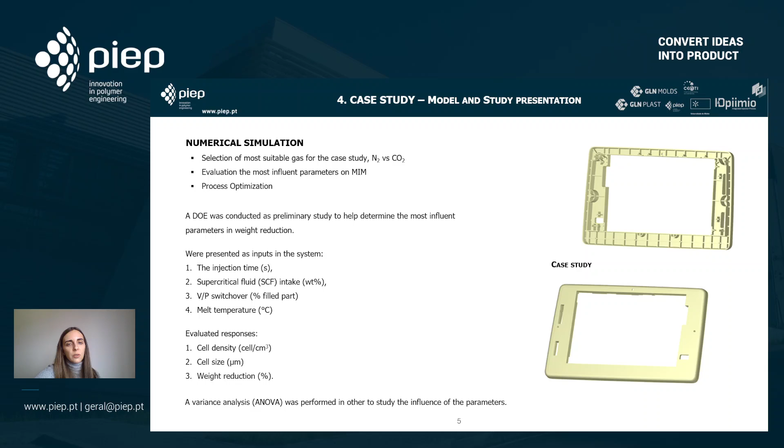So in the first case study, with nitrogen versus carbon dioxide, we started the study with different amounts of incorporation, either for CO2 or N2. We wanted to determine which was going to be better for this part. So we evaluated weight reduction, cell density, and cell size. Weight reduction would give us which gas was better to obtain higher amounts of weight reduction, and cell size and cell density would help us predict which was the better cell structure for this part.

So what we wanted to do was to analyze different amounts of incorporation of either N2 or CO2 and evaluate these results. The amount of incorporation of CO2 and N2 is very different because the gases have very different values of solubility in the polymer melt. In the case of CO2, it is much more soluble, and so to saturate the melt with the gas, you need a much higher quantity of CO2 than N2 for the same result.

So by analyzing the results we had, we could see that weight reduction was not a very variable factor, a response that we could actually vary. And it is important to note that in this phase, there is not an injection molding equipment, so a lot of the process is still being defined, so there is not an optimization. So weight reduction values here are still low, and we have to center our study on the cell size and cell density.

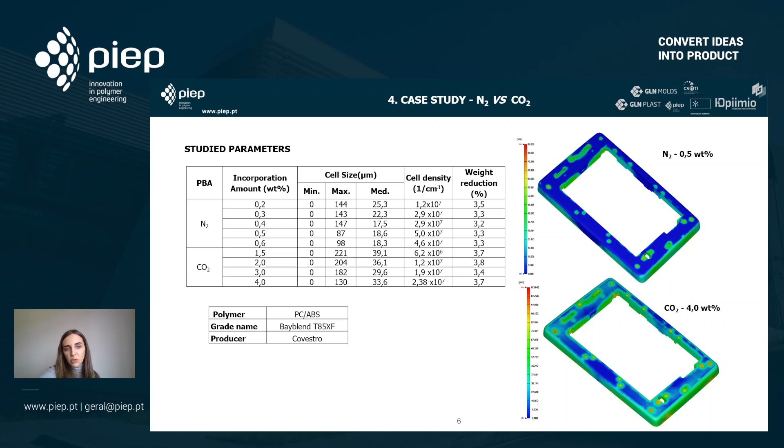So what we could analyze and define was that the cell density was higher for nitrogen than for carbon dioxide, with lower cell sizes. And what it means to have higher cell density and lower cell sizes is that for the same region, for the same cubic centimeter, you have a higher number of cells with lower size, so there is a lower quantity of empty space due to the gas, and the mechanical properties would be higher. So in this case, we chose nitrogen to continue with the study.

Having chosen nitrogen, we then went on to perform a DoE Taguchi L16 matrix to determine which were the most influent parameters to obtain high weight reduction.

In this case, the input factors were determined by an extensive literature review, and as we wanted to know specifically for this part which was the best results, we conducted this DoE with these four factors. So the factors were filling time, gas incorporation, melt temperature, and velocity pressure switchover. In this case, the velocity pressure switchover is the amount of material that is on the cavity.

So we wanted to have a 95% fill or a 98% fill of the cavity before finishing the filling of the part. Once again, the evaluated responses were cell size, cell density, and weight reduction. In this case, weight reduction is the most important. However, we have to analyze also cell size and cell density because we want to make sure that the cell structure is good for the produced part and to promote good mechanical properties.

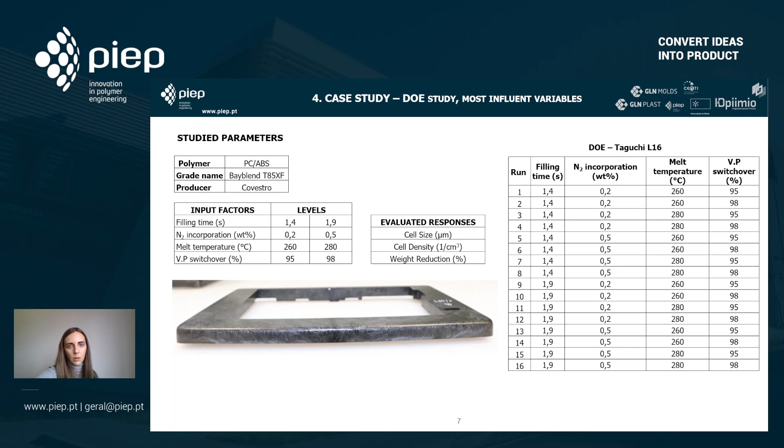Having conducted this DoE, we then study the most influent parameters as a result of the responses we obtained. The responses are presented here on the table on the right, and from the influence graphs, we can see that for cell size and cell density, we will have inverse responses. For lower cell sizes, that is what we want, we would have to incorporate 0.5 amount of the gas, which is one of the most influent parameters, and fill the cavity to 98% with the velocity pressure switchover, which is another of the most influent parameters.

In the case of cell density, we want to have higher volume of cell density. So again, we can see that the 0.5% of gas is the best result for this part, and again 98% of the fill cavity promotes also higher density for the part. But when analyzing weight reduction, we can see that the influent parameters change a bit. So what we can analyze is that the filling time is one of the most influent parameters, along with the VP switchover. It's also another very important parameter.

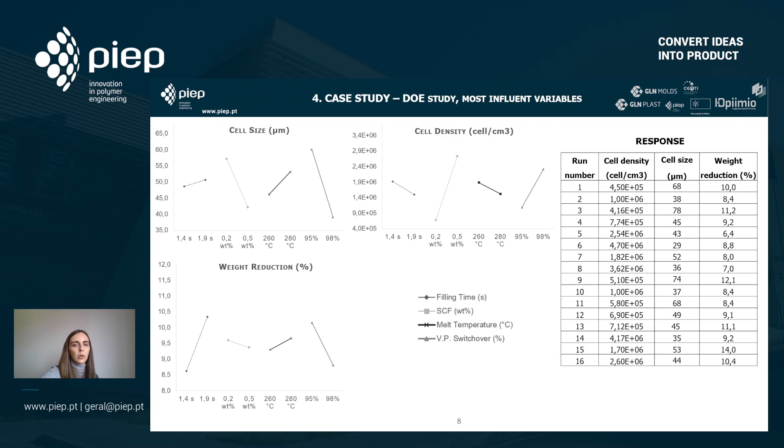Then we wanted to analyze this part. In this phase, we already had the possibility to inject some components. So we did this study and wanted to correlate this simulation with the experimental setup. We then injected some parts, and we analyzed run number 4, in which we could see that the weight reduction is very similar between the predicted and the injected part. And in the other cases, it is very similar.

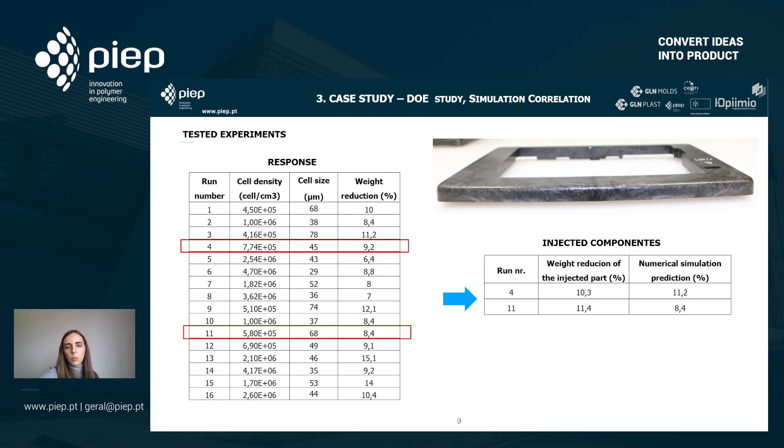However, for run number 11, we could see that we have a bit of change here. We have almost 3% of variation, which is not very high for this part because the part weighs 100 grams, and so 3% is not a lot. However, we wanted to evaluate why this variation occurred in this case specifically, and we did the correlation analysis in this part.

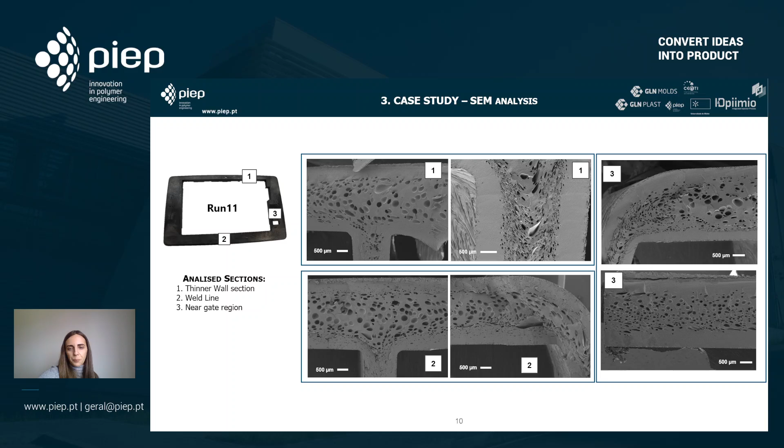We then analyzed the microcellular structure of run number 11 and did the analysis in three different sections. Number one, which is a region that is neither too far from the gate nor near the weld lines. Number two, which is near the weld lines, and number three, which is near the gate. So we expected to have different cell density throughout the part and different cell sizes, specifically because we have different regions being analyzed. And we can see some degree of that.

Analyzing this and comparing the results with a numerical simulation, we focused on the cell size of the part, the shell thickness to evaluate if the simulation could in fact evaluate the shell thickness, and the density. In this case, the cell density is not as visual, and the results that we obtain are very uniform.

So we went on and analyzed the density because we know that the density is a thing that varies along a microcellular injected part. But what we could see was that the size of the cells is very uniform throughout the numerical simulation. However, in the real setup, it varies a lot. Specifically here for this image, we have cells that go to 400 microns, and in the numerical simulation, the highest is 138 micrometers. The shell could not be clearly seen for the cell size.

However, when we go on to the density of the part, we can clearly see some differences. We can clearly see a tendency of the results. Here we can see that the shell has a higher density of material, and when you go on to the core, you have lower densities of material, and so you can conclude that there is a formation of some kind of cell structure throughout the part.

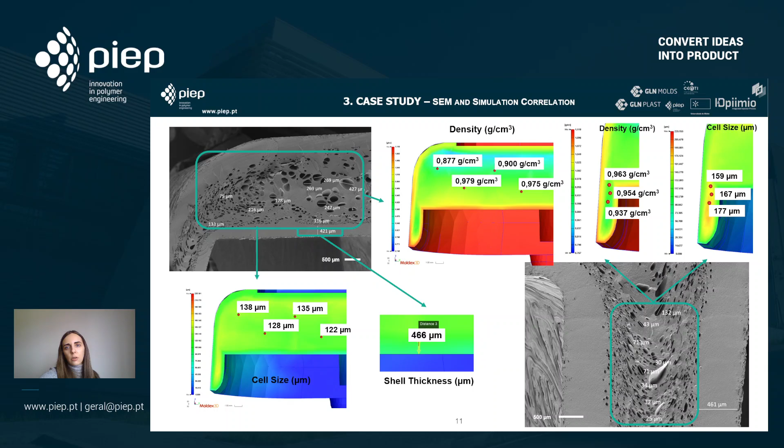The simulation can, in fact, replicate that there will be a higher shell in this section, and it can also create a tendency in the density of the part. However, for the cell sizes, once again, it could not at all replicate. It is uniform throughout the core of the part, which is not the case for the experiments we had.

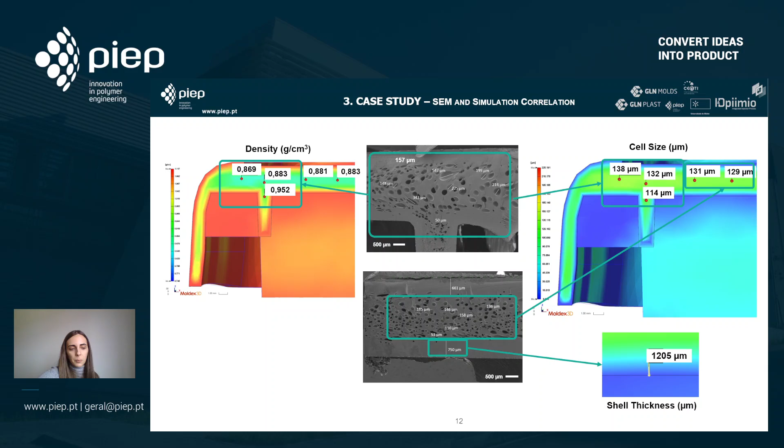And finally, we went on to a final section of the part from the analysis I showed before, and this is very interesting because we can clearly see different densities in the cell in the part. What we can see is that even for the shell in the lower section, we have some creation of cells in this shell, and it is replicated in the simulation. We can see the creation, the lower density in this case than the others I showed before.

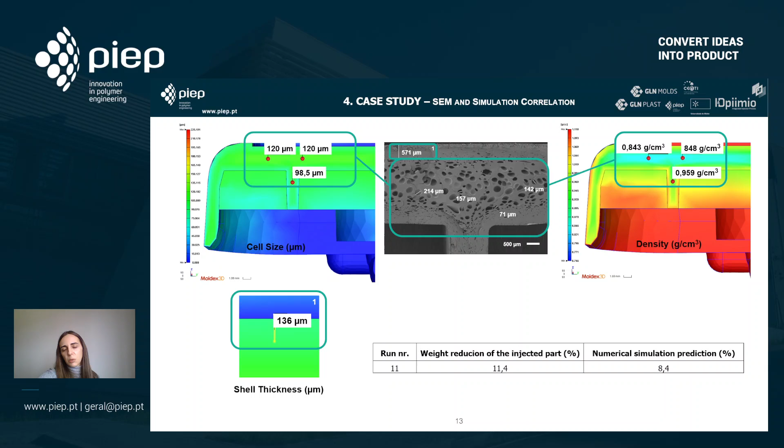Once again, the cell size could not at all replicate the real setup. Okay, so in this case, not even the shell could be replicated in the cell size. It is very different from the real setups. However, we can see that there is a creation of some cells in the numerical simulation, and that there are some cells in the real setup, and so maybe that's why the simulation could not replicate it as well, but it is not certain.

So from our study, it was possible to help select which gas was better for our part without having the necessity to produce this part and evaluate each part and characterize and do some tests to determine which gas was going to be better for us.

And again, for increasing weight reduction, we could see that the best result was the velocity pressure switchover. However, we could also see that we have to carefully analyze these results with cell size and cell density. We can see that numerical simulation can closely predict the process for weight reduction, but it cannot yet predict the cell size, but the density can be an indicator. So I think it was a good conclusion from this study.